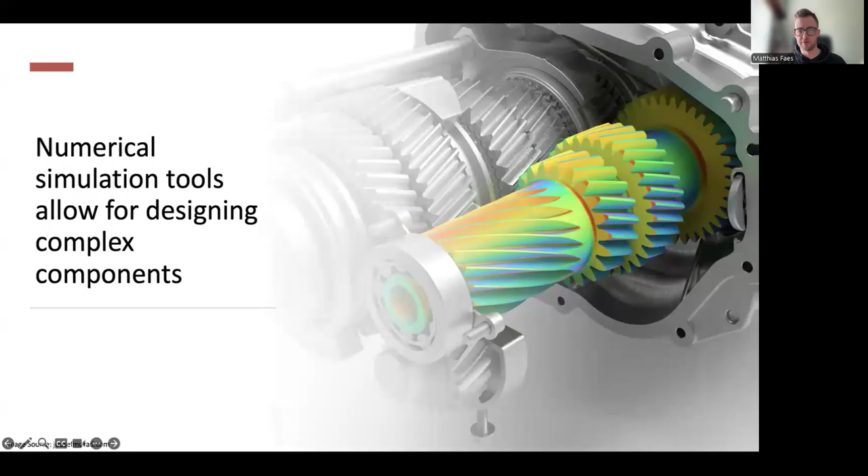So what do we do with reliability engineering, intervals, imprecise probabilities, and so forth? What we do is we try to use numerical models, solving PDEs essentially, for designing and optimizing structures in such a way that we have reliable, robust, trustworthy designs. So you see some very nice gear model, very fancy colors. That's not, of course, what we are after. We want to make sure that this gearbox runs for a predetermined number of kilometers without failing. When I say model, I feel like I need to make this precise, what I mean with a computational model, namely,

okay, this is showing very weird stuff again. Sorry for the interruption.

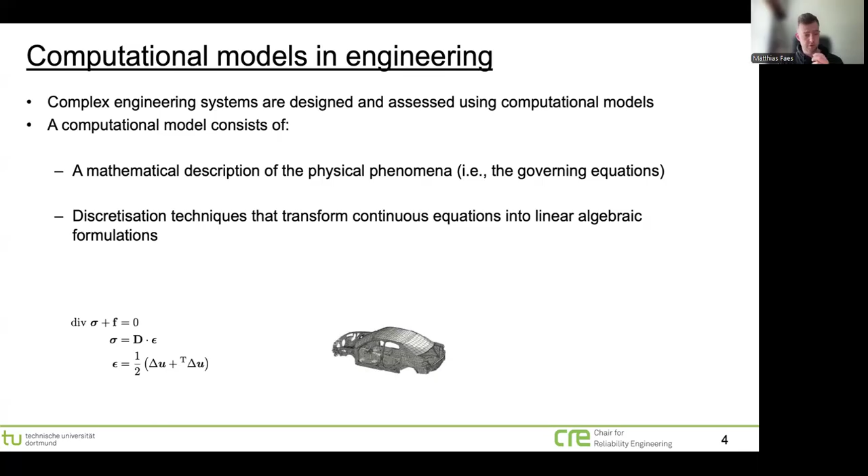Voila. So when I talk about engineering models, I talk very precisely about a computational model consisting of mathematical descriptions of the physics, meaning differential equations that describe how our structure, component, or system reacts to a certain loading. Of course, we cannot just solve these PDEs directly using our computers. So we need discretization techniques that transform these PDE sets into algebraic formulations: finite element methods, but also finite difference and finite volume methods. And we need algorithms, of course, to solve these equations.

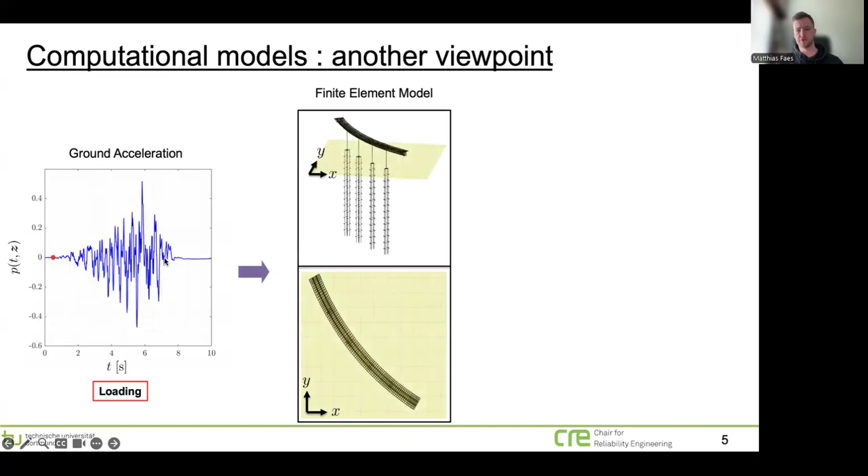Now, to take another viewpoint, suppose we put on the hat of a civil engineer. We have a bridge that we want to design against an earthquake. So we have a model that represents how the earth accelerates when this earthquake comes by. We pass this as an input to a finite element model that predicts how our bridge starts vibrating. And when our bridge is vibrating, we look, for instance, at the angle or the displacement of two columns with respect to each other. That allows us to design with a threshold. If we stay under 0.01, in this case a normalized response, we are safe. If we go above, we are failed. So in this context, we come outside of the safe domain and our bridge will collapse.

I don't know if you see my mouse pointer, by the way. Yep, that's working perfectly. Okay, perfect.

And so here we say it's failed, so we can make some changes to our design, make sure that all this response stays within the bounds.

That all sounds maybe too good to be true. And the reason why it sounds too good to be true is that it is too good to be true, because of course we don't have deterministic models for loads. We have stochastic loads. So an earthquake, you cannot predict precisely how that displacement or ground acceleration profile will look like. We need stochastic models there.

When we model our bridges, we are not really sure about everything. So traditionally in engineering, we are educated to use safety factors. That's one way to deal with it. The more current trends go towards actually quantifying the uncertainties in there as well. The issue is now, of course, if you combine the uncertainty here, the uncertainty there, we get a stochastic response. So we cannot talk anymore about whether my structure failed or is safe, but what is the probability that my structure is failed or safe?

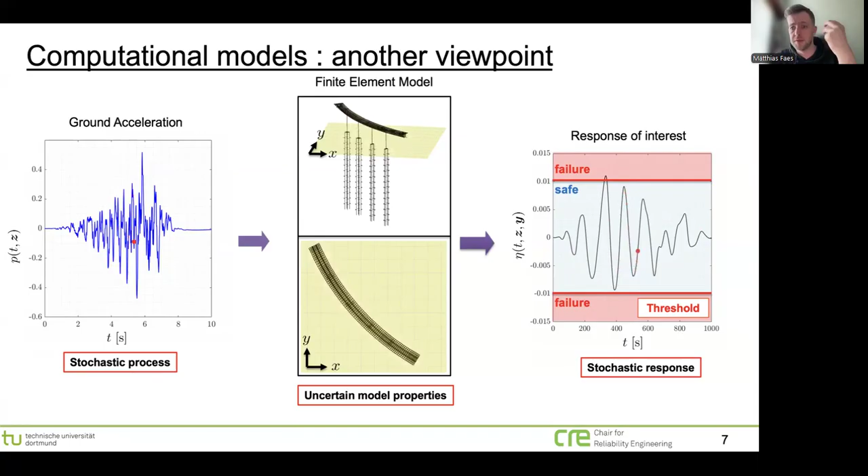So I guess I'm starting a bit too general here, but I felt like I wanted to start slow because I didn't really know who would be in the audience and so on.

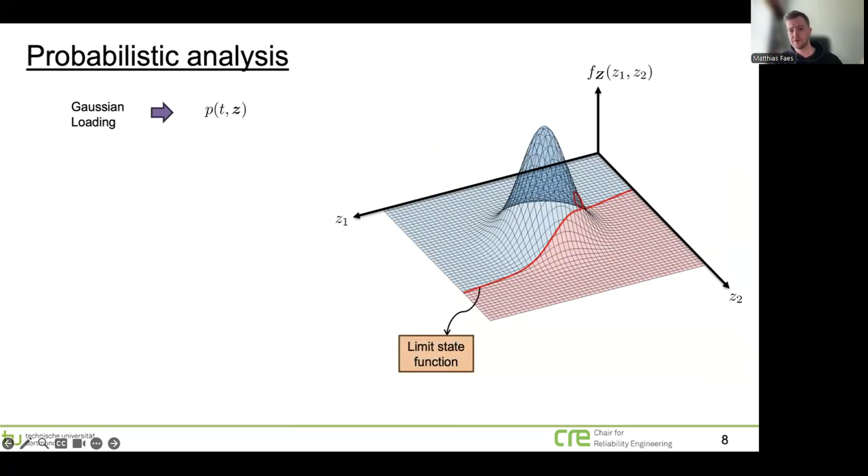So if we start with probabilistic analysis, we have a Gaussian loading, for instance. We have a limit state function. Remember the threshold line that I drew. And that limit state function separates our uncertainty domain, because we are quite sure at this point still about our uncertainty domain, in a safe domain and in a failure domain. And essentially, if we want to know now the probability that our structure will fail, we integrate this probability density function over the failure domain, and we have a measure for that probability. Any realization of my uncertain variables here will cause some response that crosses the bounds, essentially.

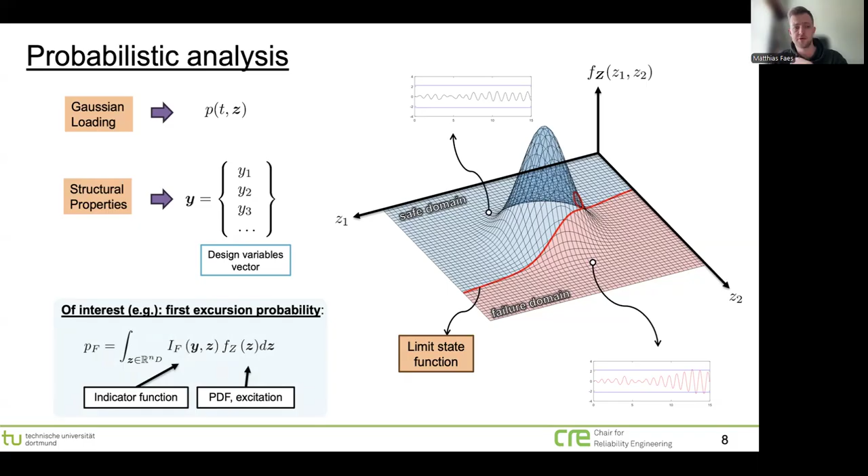Of interest, very often in our work, if we are doing dynamics at least, is first excursion probability. So we want to know the probability that some response exceeds the bounds. In other words, the probability that this earthquake will, over a predefined time domain, collapse our bridge. So far, so good. So we have a model for our stochastic process, for instance, a power spectral density function. We have a marginal distribution. We can apply this kind of stochastic models to our bridge and repeat this a lot of times to quantify our failure probability. This thing is standing in the way again, so I have to put it somewhere else.

Okay, that's a very short crash course in reliability-based design. So we are quantifying failure probabilities essentially, given the fact that we assume that we know our uncertainties. Now, the issue with that assumption is, of course, we are dealing with real data. We are dealing with the fact that we cannot measure as much as we want. So in essence, we need to have this joint distribution function f_z to estimate our failure probabilities accurately. Now, this estimation is, of course, complicated, in the sense that we have only imprecise measurements.

So we have measurement devices that don't give a very precise measurement or don't have enough resolution to give the measurement resolution we would want to have. We have small sample set sizes because we cannot just test everything all the time at any point, for the simple reason that there's never enough time and never enough money to do so. We can have incomplete expert elicitations. We can have changing environmental conditions. We can have vague information, dubious information. The point I want to make here is there is always uncertainty about the measurements that we use to fit our uncertainty. So we are turning a bit in a circle in a way.

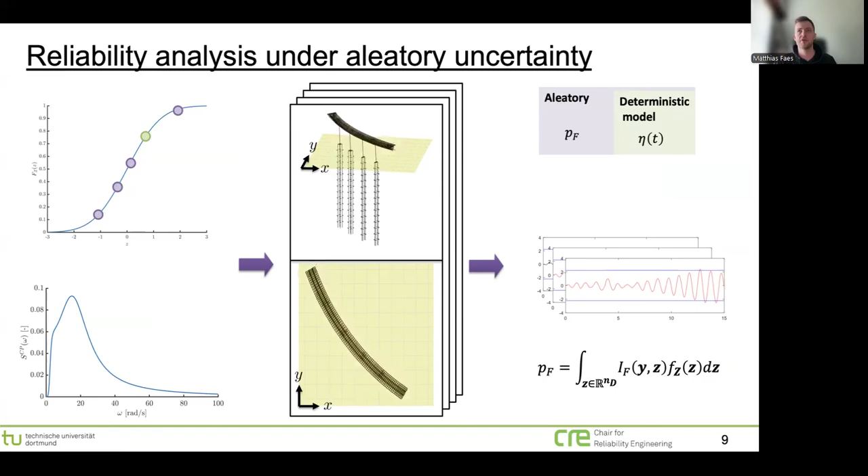Another way to look at this is what I wrote here. So we are actually observing conditional probabilities under unclear conditions. If you look at it from Bayesian theory, this failure probability, of course, is a conditional failure probability, namely it's conditional on the assumption that we have our models right. Or it's conditional on the assumption of certain parameter values for our probabilistic models.

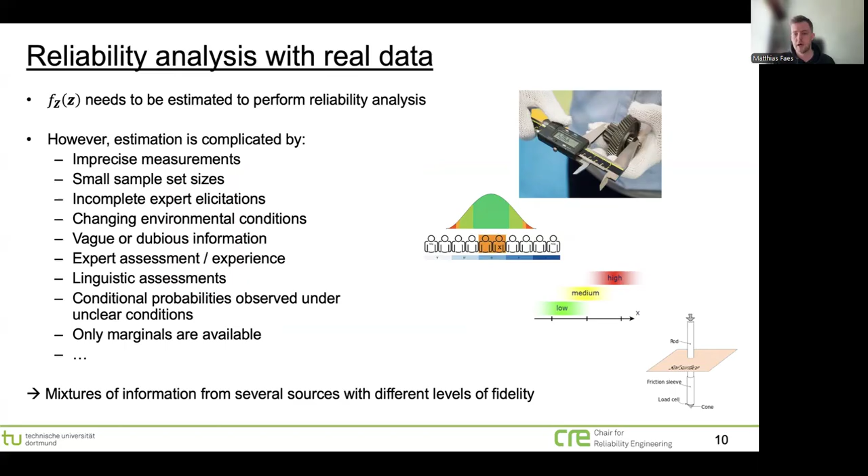What does that mean in practice? Because of course you say, of course, Matthias, that's all true, but what does it mean if I'm designing a structure? How does this affect me? So let's look at a very precise case study.

And so I showed this bridge with an earthquake. I don't know if some of you are active in the domain of earthquake engineering. In that case, I'm sorry for the simplifications I make in this introductory example, but it's to prove a point. So typically, earthquakes are modeled using power spectra such as the Clough-Penzien spectrum. So this Clough-Penzien spectrum tells us how the energy of an earthquake is distributed along several frequencies in the frequency domain.

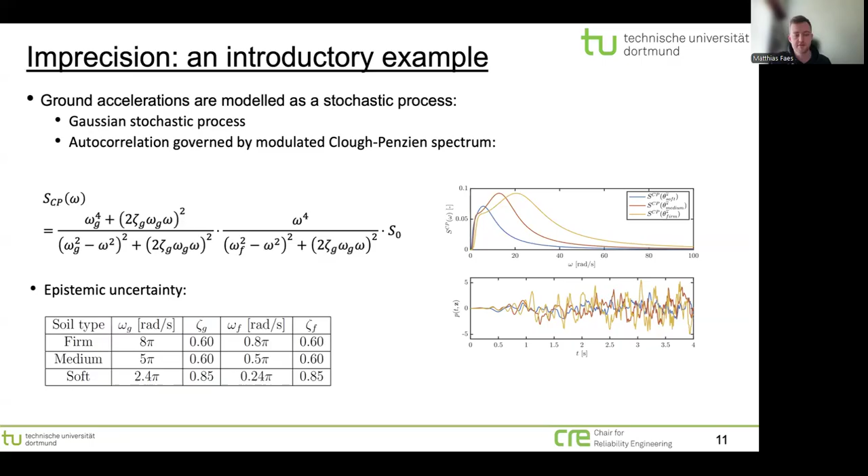I guess I'm preaching to the choir with what I'm saying now. If you do this, you're already doing some kind of implicit engineering interval analysis. Of course, it's a very rough one because you don't know what's happening inside of those bounds. Now, if you would take medium and firm soil and run a proper interval analysis over this kind of reliability problem, you end up with failure probability bounds, which are 10 to the power of minus 1 as an upper bound, and 10 to the power of minus 7 as a lower bound.

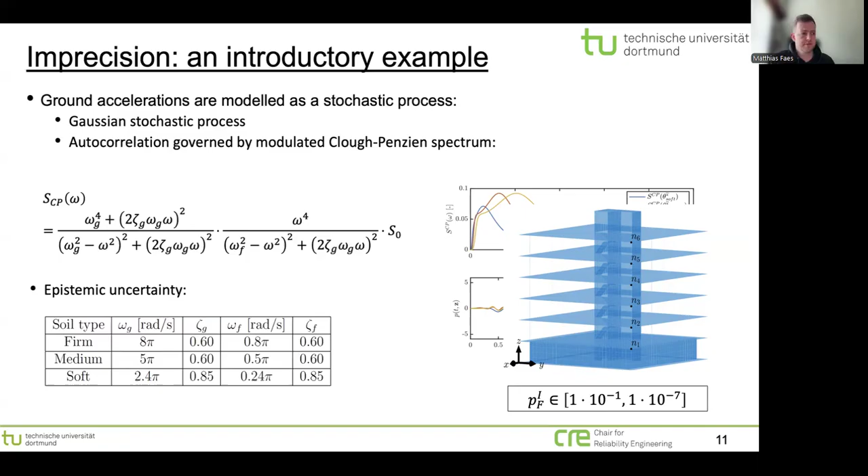So that means anything between 1 out of 10 buildings will fail, and 1 out of 10 million buildings will fail, given that earthquake. That's a real problem. So that's something that's a bit too much ignored, but that's something we need to take into account, essentially.

I'm still not getting used to online lecturing without seeing people's faces. So in case anything I say is problematic or not clear, just feel free to interrupt me, of course, because usually when I'm teaching or lecturing, I try to read from people's faces if what I'm saying makes sense. So please feel free to interrupt me.

So what I was actually trying to say in this problem is we have our models to estimate reliabilities, but we don't actually have the input to fully trust them. So rather than looking at one specific probabilistic model, we should actually be looking at sets of probabilistic models, in the sense that they represent all possible probabilistic models corresponding to the state of knowledge that we have.

Okay, that means we have here a set of marginal distributions. For instance, we have done 5 measurements of the soil. We have some idea of how it might look. Instead of saying we use this precise distribution and trust this one to the very end of the road, we say, let's take the set. Let's see what happens. The same we do with our correlation models or power spectral density models, for instance, coming from estimating different kinds of parameters in this Clough-Penzien spectrum.

We then apply all these models to our structure again, and we end up with bounds, not on our uncertainty, rather on our failure probability. Now, are those bounds? You can write the equation down like this, but that's what I meant before. Actually, we only have conditional probabilities in here for a failure probability. So if we want to find the worst and best case behavior, we have to look for those parameters inside our probabilistic models that give us worst and best case results.

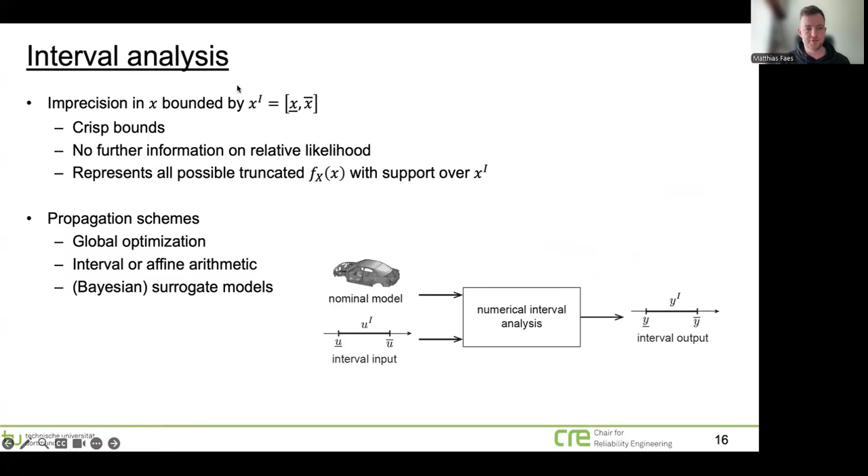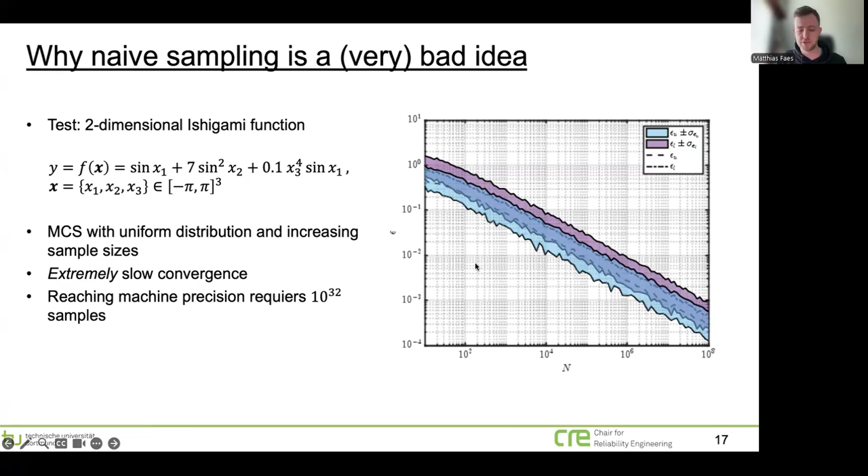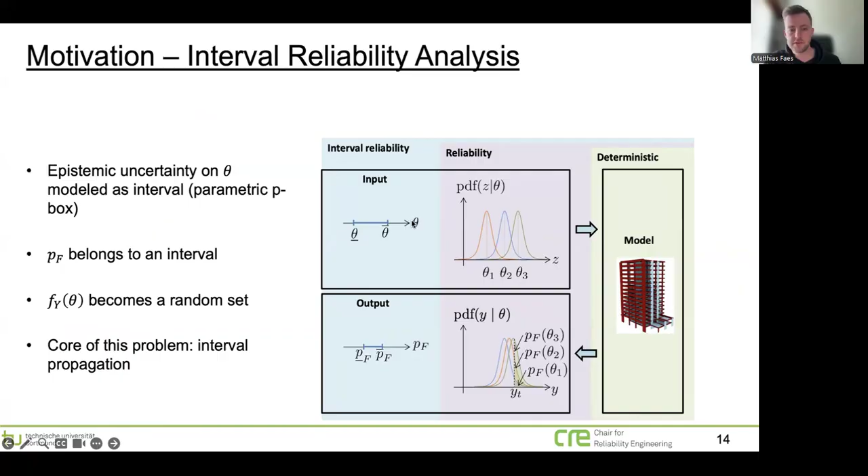So how do we perform interval analysis? I think I can skip this slide in this community. Another thing I see happen a lot, I don't know if you see it happen in your communities as well, is that people start sampling from intervals. And so you could just say, okay, I have here my bounds on my parameters. Why not generate a set of samples according to your uniform distribution, propagate those and calculate min and max over those, and then I will surely have a good idea.

That's what I quickly wanted to show with these slides, that it's a horrible idea, actually. And so you get essentially the Monte Carlo simulation rate of convergence. So I saw in the description of the lectures that you are especially looking for people doing optimization. Before I go into what we do with optimization, I first wanted to talk a little bit about how we could potentially propagate intervals with sampling.

Now, before you throw me out of this meeting immediately, it's a small trick we do, and it was more of a fun side project of one of my PhD students than anything else, but it really works very well. So the idea is the following.

We have our interval. Oi, I don't know why there are balloons flying, so I will keep my hands down. We have our interval, and what we do is we fit a Cauchy distribution to it. So we take the center point, we take the width, and this is an original idea from Vladik Kreinovich, who did this a while ago, and we took this idea and continued it further in the sense that we applied it using a multi-level quasi-Monte Carlo scheme to make this highly efficient.

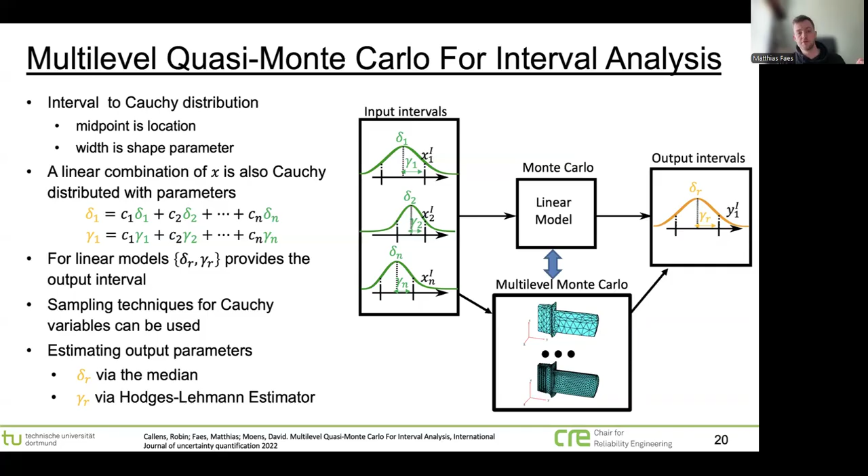So we take the interval, Cauchy distribution on top, midpoint range at least, and then we build this multi-level Monte Carlo model on top where we iteratively, adaptively select samples according to multiple levels of this Monte Carlo estimator. Because of course, if you just do sampling, you again just have a sampling efficiency of a Monte Carlo, so we wanted to make this more efficient. I will skip on the details in the view of time, but you can check the details in the paper that's below.

So essentially, what we do is we have this multi-level estimator. Where are my slides? Okay, I explained most of this, I guess. I lost my thread a little bit. Okay, here I want to say something still.

So we have our hierarchy of models, so to say. We start with a rough grid, where the idea is this is very cheap, so we can afford to simulate a lot of samples on this one. And the more fine you make your grid, the more precise your evaluation becomes, but the less samples you can afford. And so the main question is, how do I distribute the samples I take to estimate this Cauchy distribution again at the output, which we can convert back into an interval in case the model is linear. I forgot to explain that one. I'm sorry, I'm a bit chaotic sometimes.

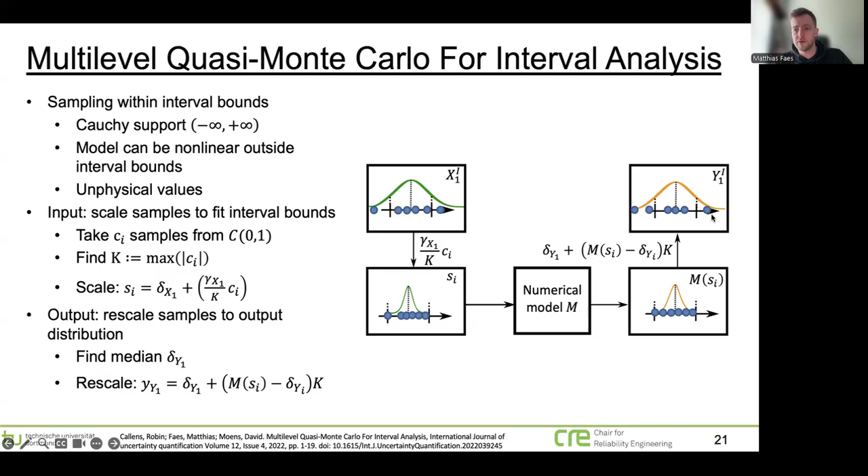So we have our Cauchy distribution, we sample from it, and we build a Cauchy distribution at the response again. Now, the main trick we pull here is, of course, that a linear combination of Cauchy distributions stays Cauchy distributed. And so that means that we can just estimate a Cauchy distribution again from the samples we generate, and we know that is an interval again with the proper rescaling and so on.

Now, the trick is, of course, we do this with a multi-level strategy where we choose how many levels we want to sample from based on the bias that we introduce. And so you can imagine this model will be fast, but will have a biased prediction because we have not a converged finite element solver.

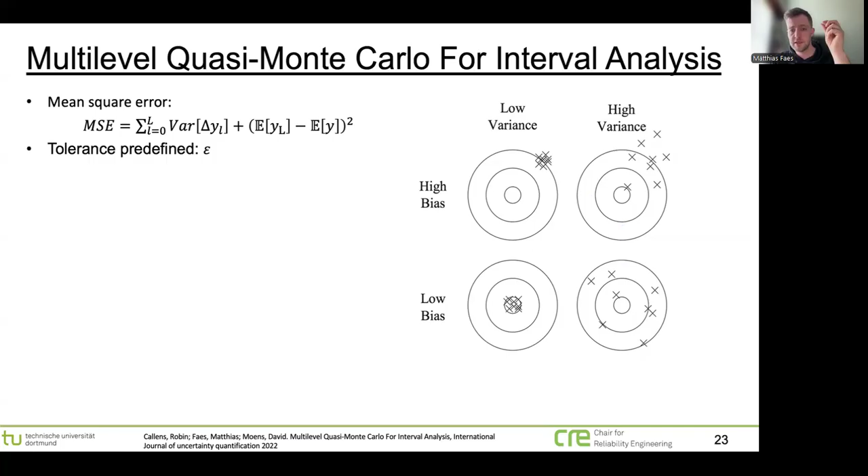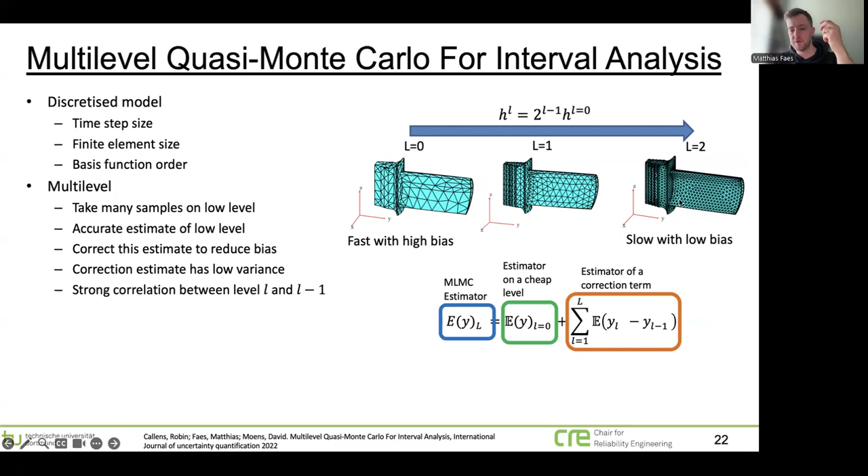And the number of samples we generate with the variance constraint. And so more samples will reduce the variance. Now, of course, as I said, we can generate a whole lot of samples here, and that's the idea. So we generate a whole lot of biased samples and then use this correction term with a few high fidelity runs to correct this bias, essentially.

And what I wanted to show is if we compare this, for instance, with a vertex analysis, works perfectly for monotonic models, but scales quite bad with the number of inputs. And what we see with this interval multi-level quasi-Monte Carlo sample is that you stay actually constant. So this is not affected by the curse of dimensionality anymore, but only works for linear models.

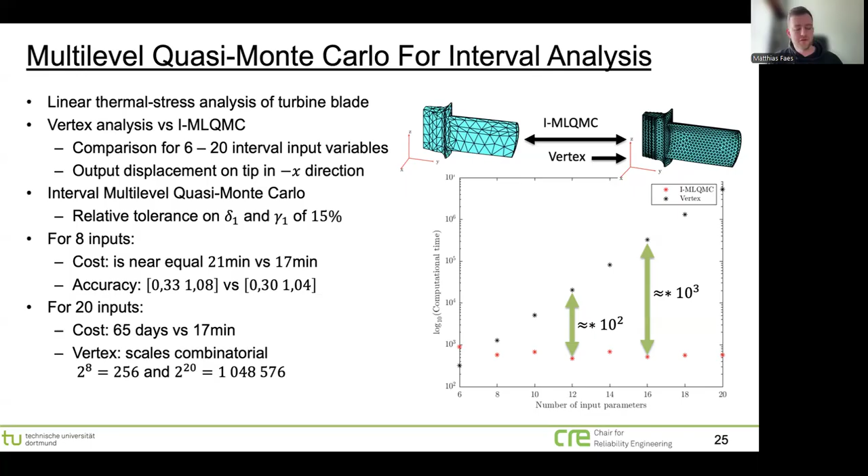As I said, it was building on an existing idea. It was a bit of fun, and he had a nice paper published with it. Okay.

A bigger piece of work we do in our group is related to Bayesian active learning schemes. And that's what I wanted to talk a little bit more about because I think they are pretty powerful. And I would also like to get some input from this community on what we are doing in there. And so the idea is the following.

We have a model, and that I explained maps from an input to an output, and we want to estimate whether that output exceeds a boundary or not. What we do here is we start with generating a data set D, having a number of observations of this input. So we run, for instance, our finite element model 20 times and build a data set. Based on this data set, we build a Gaussian process regression model and compute the maxima of the expected improvement and the minima of the expected improvement for new training points.

Okay, so what we do is we look where can I improve my estimator of my maximum of my interval, where can I optimize the estimator of my minimum of my interval, and try to learn based on a few criteria. Again, I refer to this paper because I try to keep the math as much as possible out of this presentation. Based on a few criteria, we try to balance the computation cost between finding the bounds as optimally as possible and using as few samples as we potentially can.

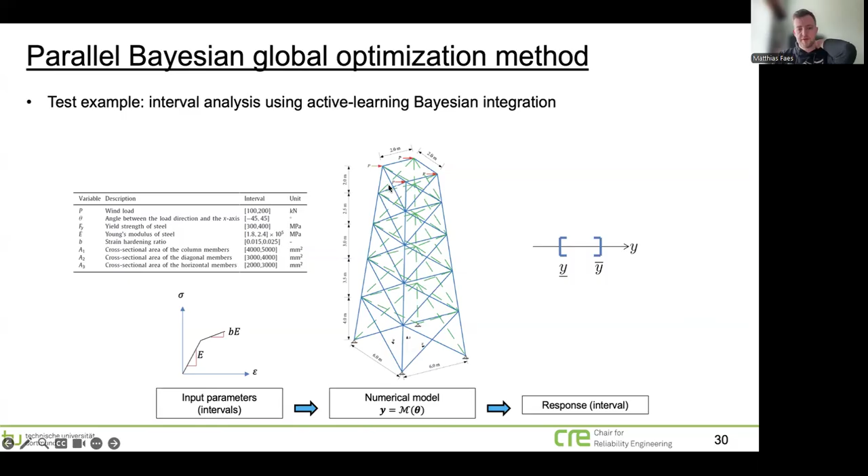Just to show that it works, we have this tower here, which is the numerical model. We have a bunch of interval inputs, and we want to know the displacement of a tip here of this tower. And normally, of course, the go-to method to use in this context would be to use an optimization algorithm, right? So you could hit it with a particle swarm optimizer, which would cost you, roughly speaking, 6,000 model calls to get those bounds. The method we designed does the same in 70 full model evaluations.

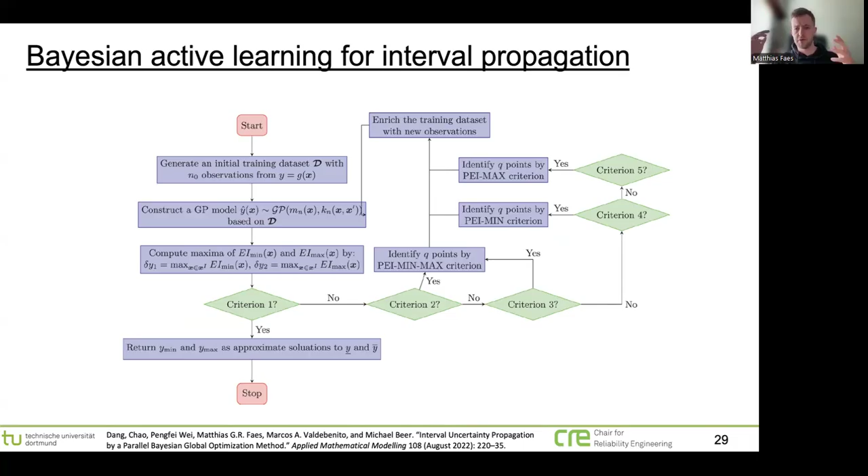Why? Because we are, of course, leveraging this Gaussian process model to do the exploration of the solution manifold, if you want, and use very select full model runs to correct if we think that a potential point is close to a boundary, if that somehow intuitively makes sense. And by doing that, you can really reduce your calculation cost with orders of magnitude. So 2 orders of magnitude to be precise.

We applied this method also in other contexts, like full reliability analysis, but also imprecise probability analysis. It's an ongoing piece of work, and I didn't update the citations on this slide, to be honest. And so this year we still published a few interesting works in this context. For instance, aiming at predicting full response distributions. So not only scalars or excursion probabilities anymore, but we can predict essentially the full response distribution. Okay.

The final topic I wanted to chat with you about is what we did very recently on combining interval analysis to model geometric uncertainties. That's quite an open topic for us, how to effectively model geometric uncertainties. I'm not talking about plate thicknesses. I'm not talking about just the pure parametric kind of geometric uncertainty like hole diameters, but I mean really shape uncertainty. The motivation could be, for instance, if you have very small intervals, you could be looking at how to model realizations of a tolerance field.

On a larger scale, it could be related to any kind of manufacturing process, wear process, anything where you are not sure about how your geometry evolves, for instance, in time or within batches or whatever reason. This paper has been accepted, by the way, 2 or 3 weeks ago.

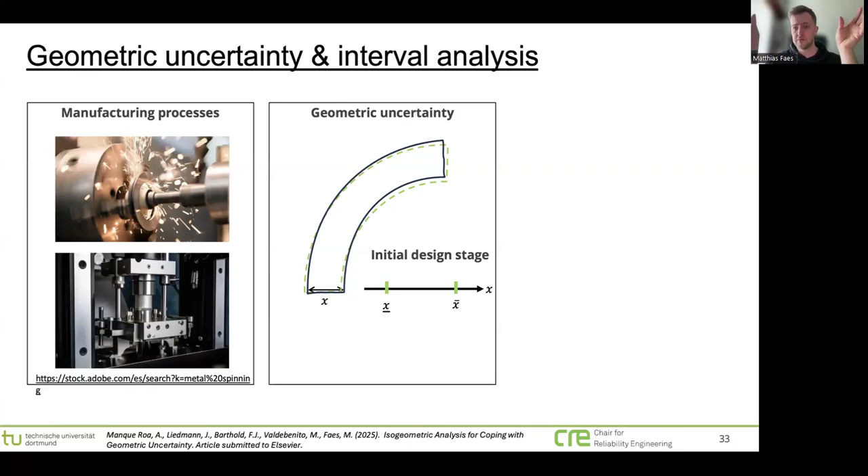So, another good example of interval uncertainty in geometry can be if you look at the design process. For instance, if you are in a very early design stage, you don't really know yet what the other people working on subcomponents of the same system are doing. So you don't know what the exact bounds or what the exact realization will be of the geometry. So what you might want to do is maximize your flexibility and work with an interval valued geometry, such that you can later fit it into some kind of design.

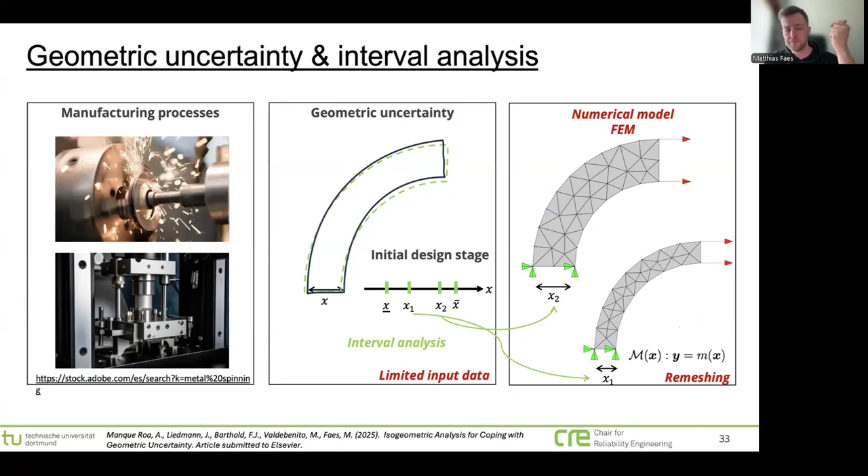That means, however, that you have to be able to deal with multiple realizations of your geometry. That's not always so easy. If you do it with a finite element model, for instance, it would mean you have to remesh. If you now want to simulate with this and with that, remeshing introduces non-differentiability in your objective function, so you cannot use gradient-based optimization anymore.

So finite elements are a bit tricky in this context to be using together with geometric uncertainty because, of course, of the remeshing, which creates issues if you do this in an interval sense to find your bounds effectively. Of course, you can say I run a metaheuristic or a swarm-based optimizer. Still, you will be generating a whole lot of new meshes, and meshing might be expensive depending on the model you're looking at.

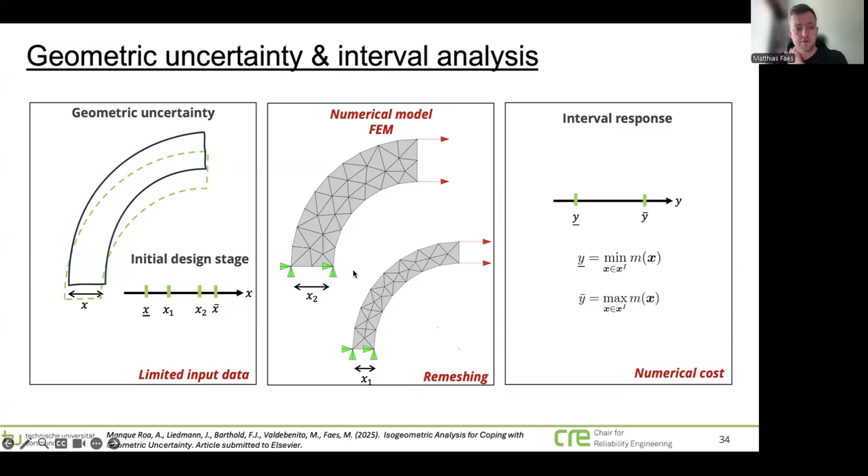So the idea what we had is to work with isogeometric analysis. So what the core idea, is it in my slides? No, it's not in my slides, so I have to explain it like this. The core idea is to use the same NURBS, so the same B-splines that are being used to model your geometry when you have a CAD model. We use those as a basis to solve the PDEs with.

And we don't just do it like this. We have a special trick we pull there, namely we build variational formulations of this IGA basis, such that in one deterministic run, now the balloons come again for some reason, in one deterministic run, we are able to predict the response and its derivatives. And by doing that, of course, we now have a very powerful tool in our hands to plug into an optimizer to find the worst and best case realizations of the geometry that minimize or maximize the response that we are looking at. Yeah, that's the idea.

And so we take out the finite element model, we plug an isogeometric analysis in there, not just any isogeometric analysis, but one that allows to generate variational formulations. If you want to know the hardcore details, I have to refer to this paper. So the article was just accepted with CMAME, I think for the issue of March 2025 it was. If you want, I can also share the paper with you later. Just drop me an email.

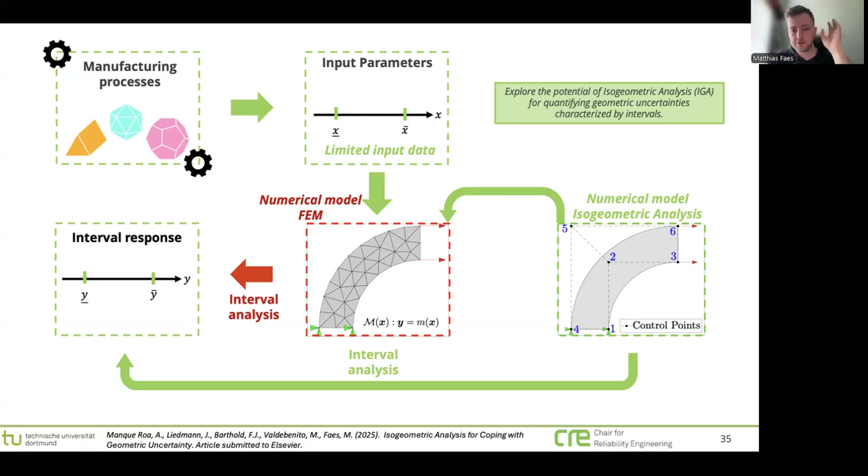Just a small example in sheet bending, but we did also in the paper a way more cool example that's not monotonic and way more difficult. So this is sheet bending. The other example is in the paper. This example that I will show you is about sheet bending, and the issue here is again an engineering issue. So you take a sheet of steel, you bend it in a certain angle, and by doing that, you might introduce damage.

This damage that you introduce depends on many factors, one of them being the starting geometry of your sheet. Okay, so what we do to quantify this damage is we calculate a quantity called the stress triaxiality, which is related to the deviatoric and the volumetric stress tensors that are being predicted by your PDE models. And we want to know essentially worst case and best case, how does my damage in this sheet of metal look like after it has been metal formed. And thanks to our variational formulations that we build of this IGA model, we can also calculate the sensitivity as a byproduct of one deterministic analysis.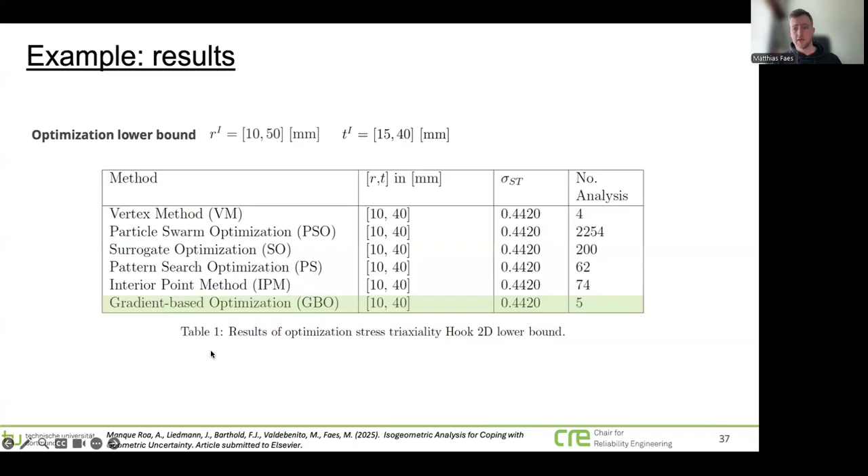Yeah, okay, that brings me already to the conclusions. I realize that I was a bit faster than I planned to be for some reason.

So to conclude this talk, if we are doing engineering analysis, we are faced with imprecision. We are not just faced with uncertainty, but we are also faced with the fact that we don't have enough resolution in our observations to model the uncertainty properly. And that means we might not have enough data, we might not have enough knowledge, we might not have enough money to generate everything we need.

So in the end, we are looking at a random world through filtered glasses, if you can put it like that. This epistemic uncertainty that we have, the fact that we cannot really see everything the way we want to see it, gives rise to problems. Namely, we can only bound our reliability levels, and intervals are actually very powerful tools in that context because they are honest.

They just say, look, I don't know. I have reasons to believe it's between this bound and that bound. And that gives you then a tool to say something about how sensitive your reliability is with respect to this lack of knowledge that you have.

Now, propagating these intervals through reliability analysis is extremely tricky because, of course, you can brute force your way through it, but then you end up running a global optimization algorithm over a probabilistic analysis, which will cost you forever. So therefore, we have developed a few methods. One was a bit more fun approach based on multi-level Monte Carlo simulation in combination with a Cauchy distribution, which was actually an existing idea that we took and made faster.

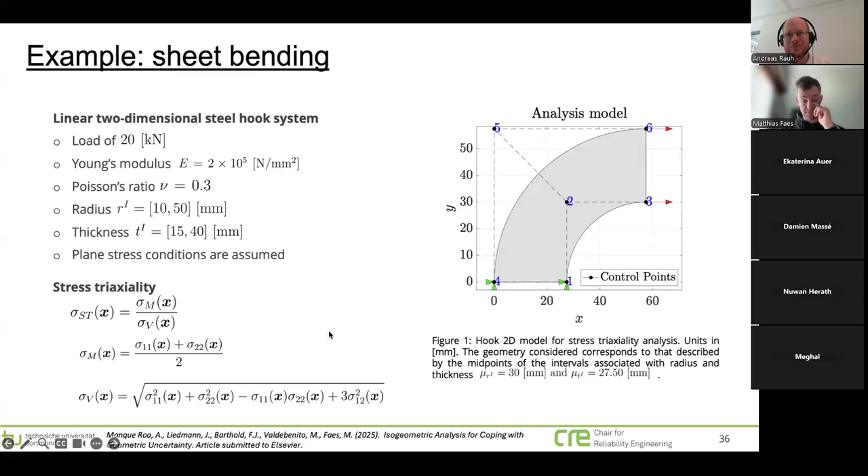And my next question is, so in the conclusions, you told us that propagating intervals through black box models is tricky. That's correct, and I absolutely agree. But when you say tricky, it sounds like you know how to do this, at least in a couple of cases. So do you know how to propagate intervals deterministically through black box models, or what do you mean by that? Can you do this without stochastic models?

Yes, so there are a bunch of ways. The most intrusive one would be to replace all your arithmetic with interval arithmetic, where you end up with the risk of blowing up. But that wouldn't be a black box model. No, indeed, not black box. So I'm interested in black box. Can you do this in black box models without stochastics?

I think the only way in which you can attempt it is to use a global optimizer. But then, of course, it depends on whether you can have some convexity. Then you don't need a global optimizer. So optimization would be one way that comes to mind. That's how we do it, at least. If we have a pure black box where we have no idea what's inside and we cannot do anything else, the safest option is to hit it with a global optimizer. That's in the end what we do with these Gaussian process models also.